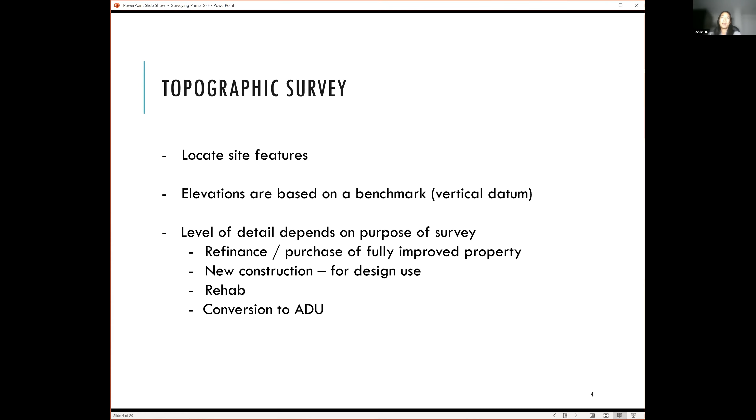A boundary survey's purpose is to establish the property line locations, identify any easements or rights of way, and also identify any boundary issues. Boundary issues might be: are there gaps or overlaps in title? Are there any errors in the legal description? Are there any encroachments onto the property based on the resulting location of the boundary?

The way in which we determine where the property line locations are is based on a bunch of evidence. So the first thing we always ask when an architect or homeowner asks us for a quote for a survey is, do you have the grant deed or the title report? The reason we ask for that is both of these documents contain the legal description of the property, which is what we use to determine where the property lines are. We also look to other types of maps: assessor's maps, monument maps, record maps. And then of course we go out in the field and collect field survey data. We look at all of this evidence in total to determine where the property lines are located. So I'll go through a couple samples of each of these.

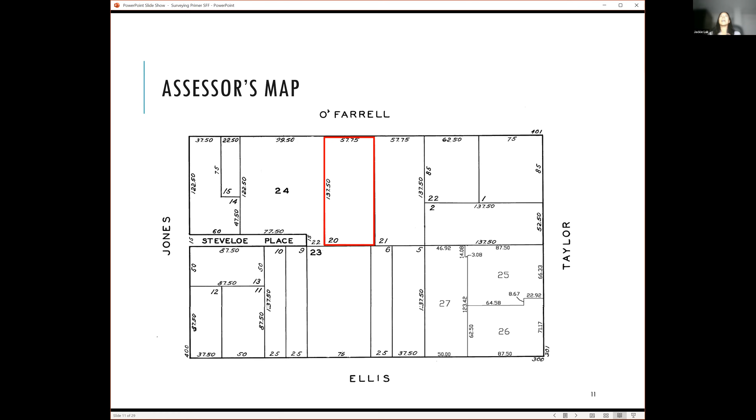There are sometimes inaccuracies in assessor's parcel maps because they're just quickly reading the deed and transposing the dimensions, but they're not official. So when there is a record map that conflicts with the assessor's map, the record map will always govern over the assessor's map.

Certain cities publish monument maps—San Francisco, Oakland, and Berkeley have them. There was a question about where monuments are and where you find them. For San Francisco, the monument maps are published on a website; for Oakland and Berkeley, you have to email the surveyor's office to get them. But I don't know that you as an architect would necessarily have a great need for obtaining these, because they're really for the surveyor's use in determining where the property boundaries are.

The monument maps are used to determine where right-of-way lines are for the city. Here, for this one in San Francisco, I'm zooming in on a corner of this monument map. This shows that in the upper right corner, there's a mark on a building—a 9-story building, on the corner, 1 foot up—and that mark is located 31.89 feet from the monument line.

So as a surveyor retracing the property boundary, let's say our property is on this block, then we would locate three or four monuments on Post Street, 3 or 4 monuments on this perpendicular street, and we would use the distances of those monuments shown on the map to retrace these monument lines, and then offset the distances shown on this map to establish the right-of-way lines of these respective streets.

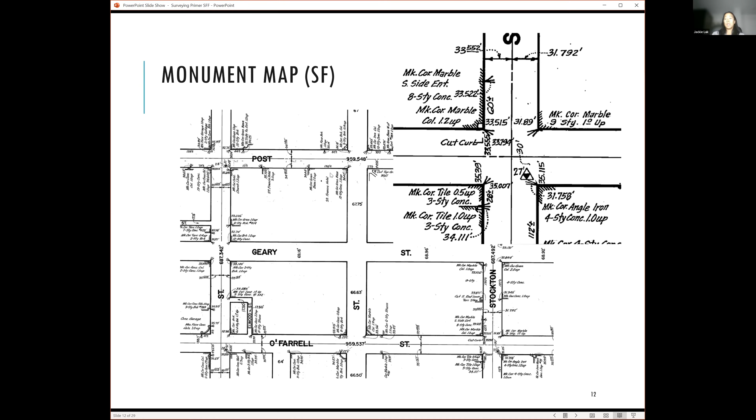Here's a sample of a map in Oakland. So if we zoom in on a particular block, if we were trying to determine where the property boundary were for a house on this block, the monuments that are circled are the ones within the street intersections, so we would locate those monuments.

What's boxed, so this 5N and 5W on the right-hand side, means that the monument line of Arlington Street and of Los Angeles Street is located 5 foot north and 5 foot west of the center line. So if we were to need to establish the right-of-way line of Los Angeles and 57th...

For the whole block, really, for Arlington, for example, let's say we located these 2 circled monuments, we draw a line connecting those 2, offset the line 5 feet to the south to establish the center line of Arlington, and then offset that line another 25 feet, since this is a 50-foot wide street, to establish the south right-of-way line of Arlington. We would do the same for the surrounding streets.

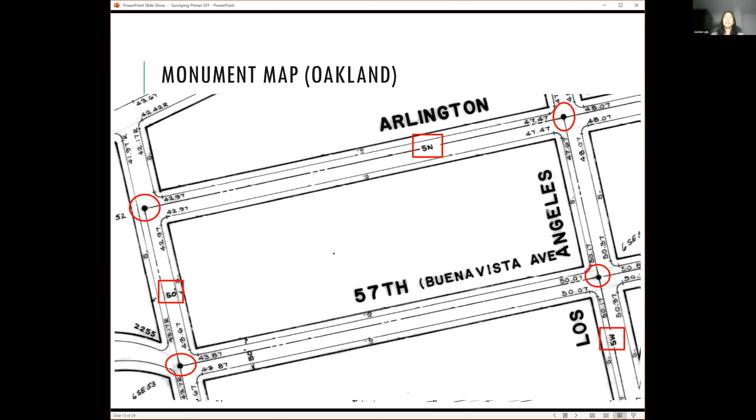So we go into the field and we look for all the monuments that are either maintained by the county or city, shown on record maps, or set by private surveyors as shown on corner records or records of survey, all of which are typically on file with the county that the property is located in. And then we also survey evidence of improvements such as fence lines, top of curb, and back of sidewalk.

So fence lines are not where the property line is located, but they are an indication of where a property line is believed to be. Fence lines are not taken with the same weight as monuments, but in the absence of monuments, we still use fence lines as evidence to determine where the property lines are.

So when surveyors talk about determining property lines, we call it a boundary resolution. The reason why we call it that is, if you hire 10 different surveyors, they may come up with 10 different solutions because we are weighing all of this evidence together. Most of the time it should not differ by more than an inch or two here and there, but it really depends on the case in terms of how much ambiguity there is, whether there are monuments, or whether we're relying solely on improvements to determine those property line locations.

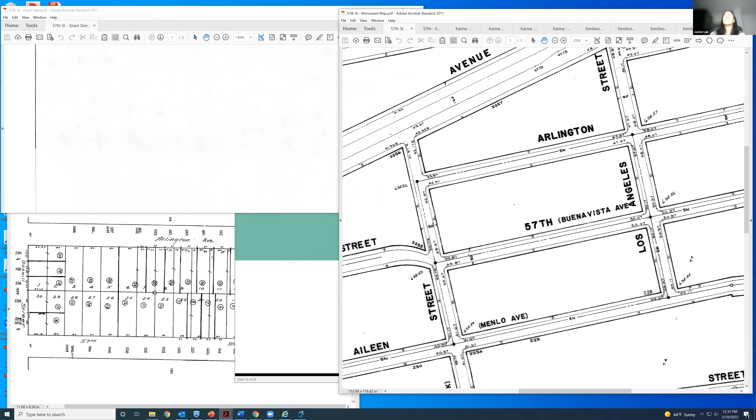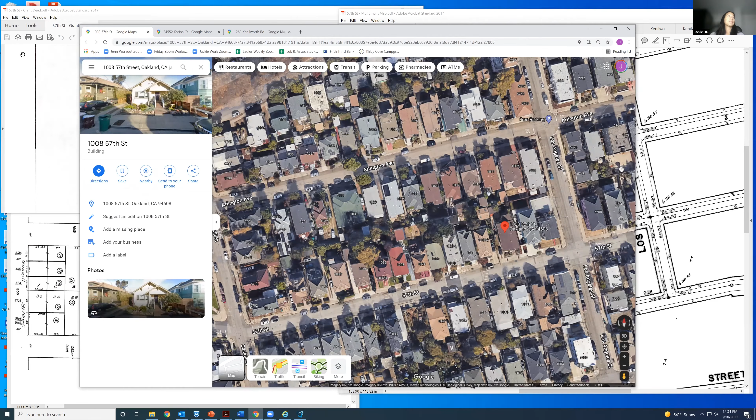All right, let's go through a few examples. The first is actually the monument map we were just looking at in Oakland. It's a single family home in Oakland, and I think their intent is to build an ADU in their backyard. So the scope of this survey was just a boundary survey to understand where the existing improvements are relative to the property line. This is the grant deed we received from the homeowner, this is the Assessor's Map, and this is the monument map we were just looking at.

Starting at the legal description, it says we're beginning at a point on the northerly line of 57th Street, going to the intersection of Los Angeles, then going 80 feet westerly to the point of beginning of this lot. Then running 40 feet along 57th Street, then at right angles 100 feet, 40 feet, 100 feet, back down to the point of beginning. So what I described earlier was locating 2 or 3 monuments on Los Angeles and 2 or 3 along 57th, then trying to locate these monuments from the monument map so we could reestablish this block. Because this is a metes and bounds description, it has a point of beginning that starts at a point of commencement from this corner and goes over. Once we establish the monument lines and right-of-way lines from 57th and Los Angeles, we can essentially put back this parcel.

The assessor's map is important because sometimes it's just a lot and block description - let's say this refers to lot 18 of this block from a map from 1890. If we don't have monuments, or even if we do, we may find that the measured overall dimension of the block is different, less or more, than the record dimension. So the overall dimension on the 1890 map might be 600, whereas when we measure in the field based on bisecting the curb or locating monument lines, maybe it's 600.5 - the overall block is 6 inches larger than the record dimension. Then, depending on how the parcel is described, we end up prorating the overage across all the lots. So if there's an extra 6 inches over 10 lots, each lot gets an extra amount - rather than being 40 feet, it would be 40.05 feet, because the block is bigger than the record dimension.

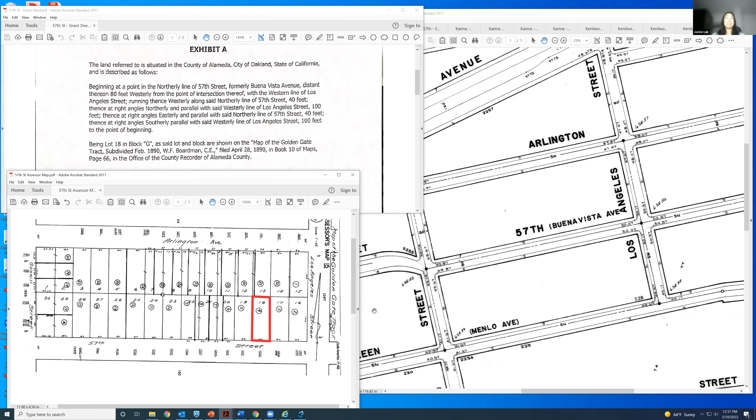So this is what the final product of that survey looked like. We're showing the monuments we located on 57th, ties from that monument line to the corner, and the 80-foot dimension shown in the deed. This is the property boundary, and we're showing the building - the accessory building in the back - as well as dimensions from the building corners to the various property lines.

So that's one example of a pretty limited scope of survey that we typically do.

Here's another example. This is a 10,000 square foot lot in Hayward that our client is looking to build a new single family home on.

This is the title report we received, which is just a lot and block legal description - lot 30 of this tract map. So basically all we have to do is look at this tract map to establish the property boundaries. This is the lot in question, and these are the monuments we showed on an earlier slide that we located.

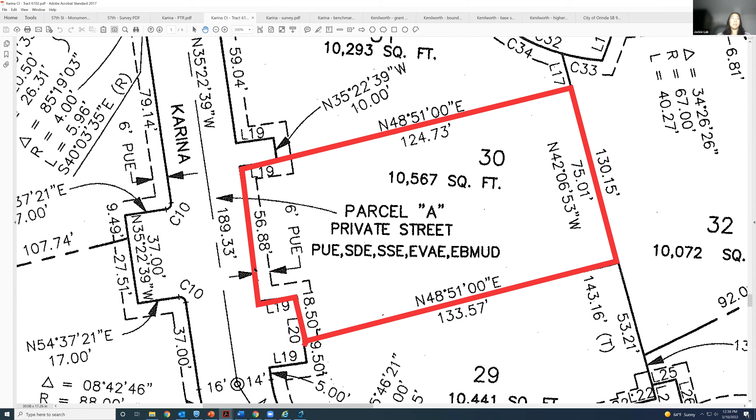Also on this map, they're showing parcel A, which is a private street, Karina Court, has various easements across it. And on the parcel itself, there's a 6-foot PUE, public utility easement. Basically all of the information needed to determine the property boundary is contained on this map.

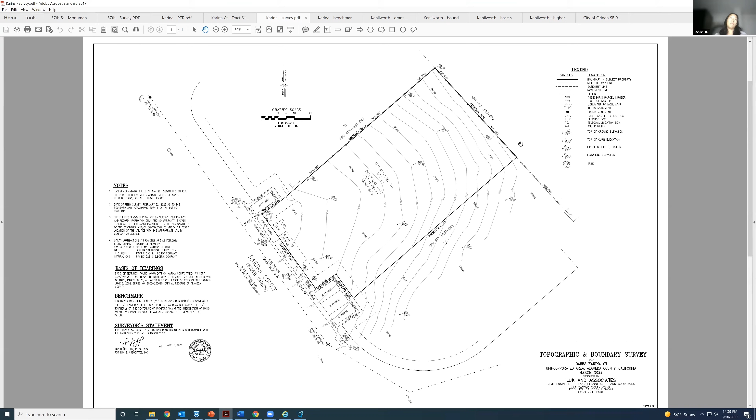So this is what our final product looked like. Obviously, because they were building a new home on the property, they need to know the elevation. This is a pretty steeply sloping lot, so they want to know how it slopes. We show the monuments we found, how we're tying to the property line, the easements on the property, the site features, topography, parking spaces, evidence of utilities we find on the lot, and the elevations.

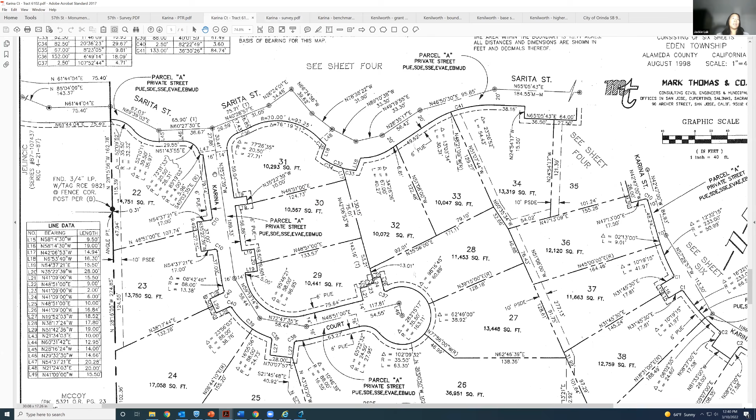On the survey, we will often list a basis of bearings and a benchmark. Basis of bearings is basically how we came up with the bearings shown. In this case it's pretty straightforward because we're matching the bearings shown on this map. On the 57th Street survey, nobody did a survey of this particular lot in the past.

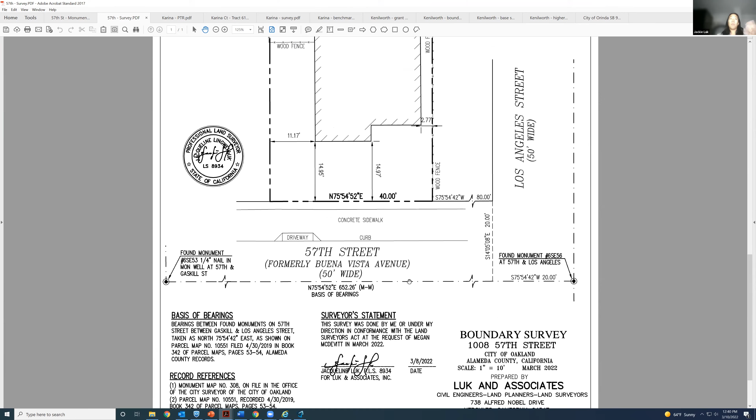But somebody did do a survey of some other parcel where they showed the bearing between these two monuments. So in that case, our basis of bearings is the bearing between these two monuments, taken as North 755442 East, as shown on this parcel map filed in 2019. That's an example of using a previously recorded map as evidence for how we came up with the bearing for this parcel.

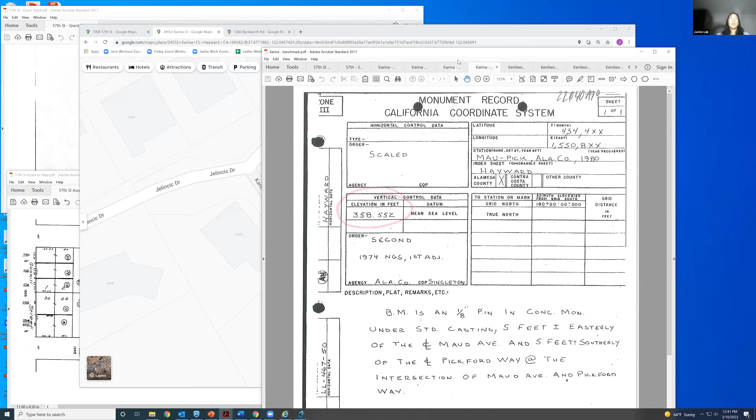The other piece of information on this survey is the benchmark, because we're showing elevations. This is the benchmark we used - a published benchmark by Alameda County with a specific elevation, specifying the datum, which is mean sea level. We located this benchmark and used it to establish the elevations for the property.

Whenever we show elevations on a property, it's possible to set what surveyors call a temporary benchmark, TBM, where they're just setting a mark or nail in the sidewalk and saying this is elevation 100. If that's the case, the datum is just an assumed datum, because we assigned an arbitrary elevation to this nail, and everything shown on the survey is relative to that.

We usually try, when possible, to tie into a published benchmark. Cities sometimes require it - City of Oakland generally requires surveys be tied to their datum so they can compare apples to apples. But oftentimes, if it's a survey for some limited purpose where you only need relative elevations, you don't really need to go to the trouble of tying into an established datum, and an assumed datum is fine. As I mentioned, if a FEMA flood elevation is important, it would definitely be necessary to tie into the NAVD 88 datum.

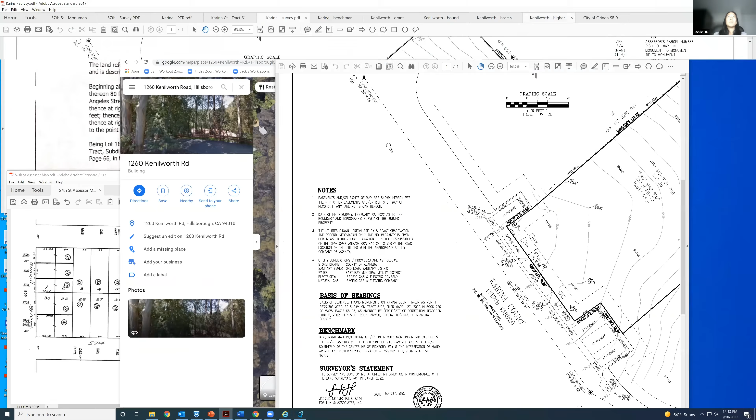And then our last example - this is a house, a bigger property, about 2.7 acres in Hillsborough, pretty heavily vegetated. This is the legal description of the parcel. Whenever it says 'beginning' and has a lot of words, it's to the point of beginning. This is another example of a metes and bounds description.

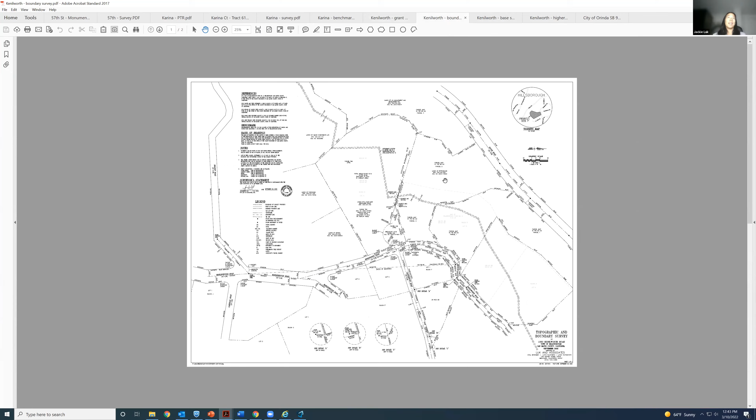Just to show you an example of how complicated it can get - this is the parcel here. In order to determine the property line, we had to locate monuments pretty far away from the site to reestablish this property boundary. This sometimes happens - this is a larger parcel, 2.7 acres, but it can be this complicated for a parcel that's only 5,000 square feet. So when pricing for boundary surveys varies widely, this is one of the reasons why.

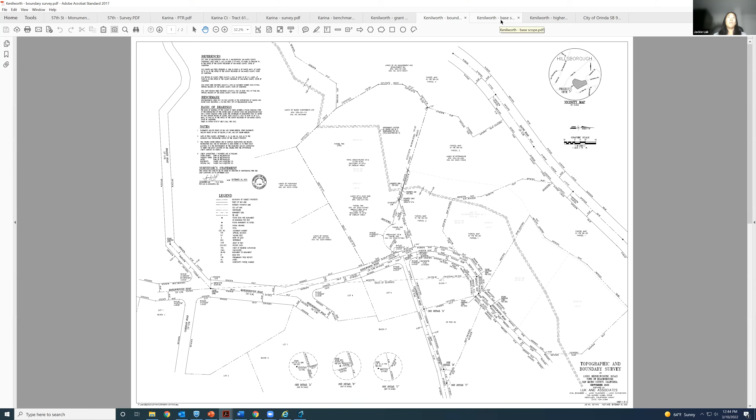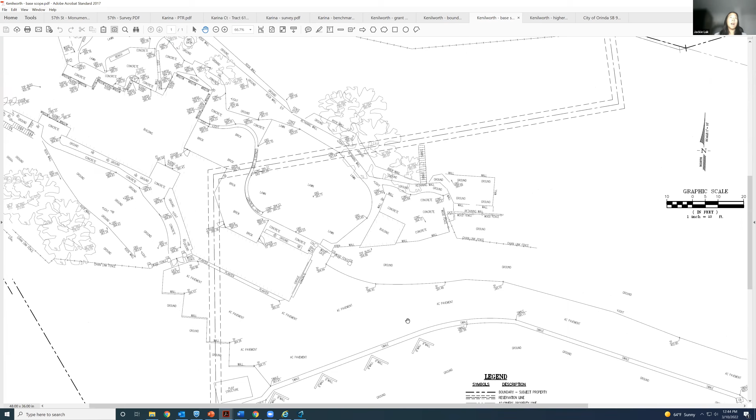In terms of the scope of this topographic survey, the homeowner was doing improvements to the property, but it wasn't totally clear at the start of the project where their improvements would be. So our base price and initial scope was only to survey the existing improvements—the roadway up to the house, and anything with an existing site feature like a wall, fence, or building.

As they got further into design, they realized they needed much more data. So we ended up going back several times to get more topographic information based on needs from their architect and civil engineer, so that our final survey included a lot of tree information, contours, and that kind of thing.

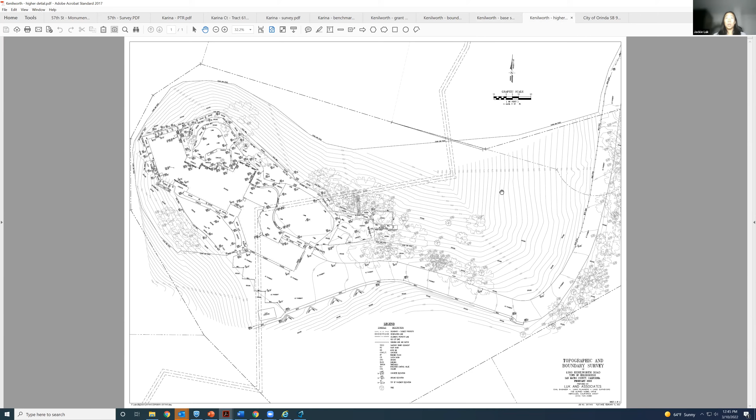There were a couple questions regarding scope that people had—what things are expensive or not. If you do need elevation information, that adds cost. If you do need to know where trees are located, that's also cost. For this project, because it was so heavily vegetated, our initial proposal excluded anything in dense areas of vegetation we couldn't access. The clearer the site is from a sight lines point of view, the simpler it is for us to survey it.

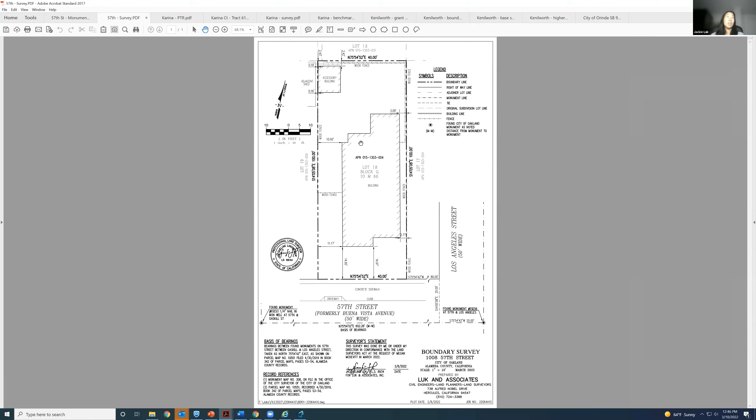So how much do surveys cost? A survey like this, pretty straightforward, just establishing property boundaries, cost about $2,800. This one, a 10,000 square foot vacant lot with a pretty straightforward boundary resolution, was about $5,000. And the topographic and boundary survey here—the base scope was about $14,000, and all the additional detail was an additional 8 or so. So that gives you an idea of what pricing is based on scope.

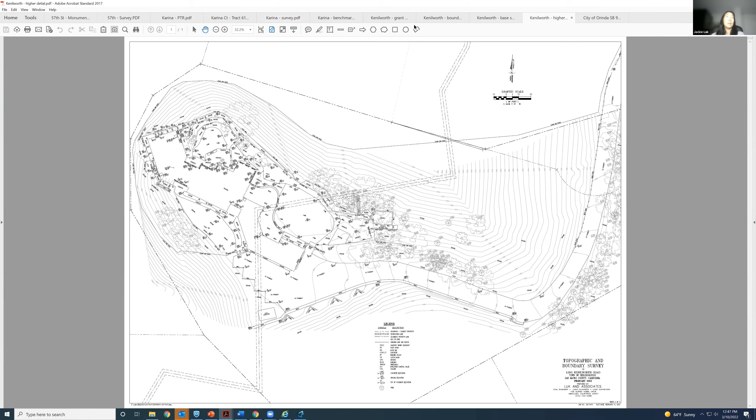Okay, so just looking at some of these questions—they're a little bit all over the place, so I think I might come back to the questions at the end. So let's see.

Is our output digital, 2D, CAD, or any 3D software? If we generate contours, we can send that out as a 3D surface. Otherwise, for basic surveys where we're not generating contours, all of our information is issued in 2D CAD—the boundary and the topo. The boundary is obviously 2D, and the topo, unless we build a surface, will also be 2D line work. We typically issue a CAD file containing all the points we survey; those will not be elevated, but can be converted to elevation if needed.

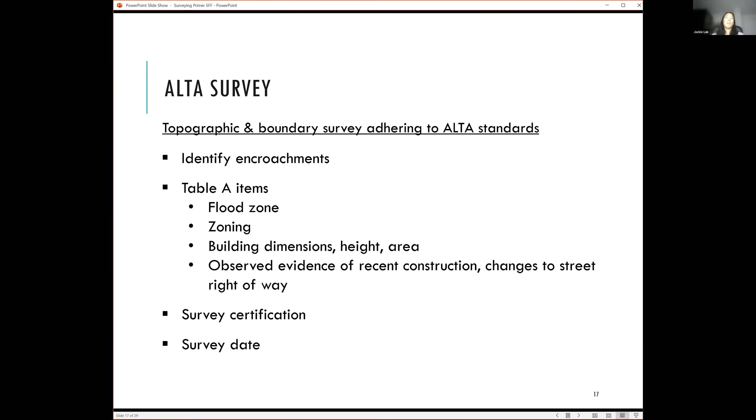It also includes observing evidence of recent construction and changes to street right-of-way. Oftentimes the ALTA survey is required to be certified to certain parties and has to have a date within 30 days of closing for whatever reason.

ALTA surveys are typically required as due diligence when a property is being purchased or refinanced. This is pretty common in a lot of our projects where a lender or title insurer will require an ALTA survey to be done.

They are often done in multiple stages: at acquisition, when the property is purchased, and at construction closing, where there's often an update required by the lender.

Sometimes we do an ALTA pro forma, which is, let's say, for an affordable housing project that's recording an airspace parcel map. The lender wants to see what the condition of the property looks like after closing.

Often on these types of deals, the parcel map gets recorded at closing because it's a complicated transaction where, say, the city owns the land and is transferring it to a nonprofit developer. There's an order in which documents record, and the map can only record subsequent to the transfer.

So then we would produce an ALTA survey based on a title pro forma report that shows the condition of the property after closing is completed.

Then often post-construction, we would do an as-built ALTA showing all the newly built improvements, again for this affordable housing project, also based on a title report at the end of construction, which may show new easements and encumbrances recorded during construction of the project.

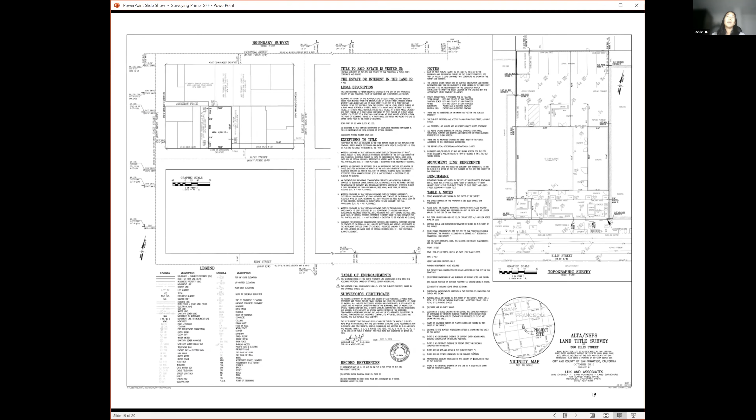There's a bunch of notes in there showing what the title report says, what the exceptions to title are, a table of encroachments, a certain format of surveyor's certificate, and a bunch of Table A notes required for the ALTA.

Touching quickly on subdivisions, a subdivision is when you want to subdivide land into 2 or more parcels. It's always a 2-step process.

The first step is filing a tentative map, typically with the city's or county's planning department. The tentative map is basically a topographic and boundary survey formatted to show additional information, such as where your new lot line wants to be and whether there are any new easements you want to record on the parcel or new parcel.

Then the second step, after the tentative map is approved by the jurisdiction, is filing a parcel map or a final map. The only difference between the two is how many lots you're creating. If you're creating 4 lots or fewer, that's a parcel map, and if you're creating 5 lots or more, it's a final map.

Usually a final map has additional layers of approval. For example, in San Francisco and Oakland, a final map needs to go to city council on their consent agenda to be approved and signed, whereas the parcel map does not.

Subdivisions can be land subdivisions, which is what most people are used to seeing, but they can also be subdivisions of airspace, such as condominiums. A condominium is a 1-lot subdivision, so basically the land itself is not being subdivided, but the airspace above the land is being subdivided.

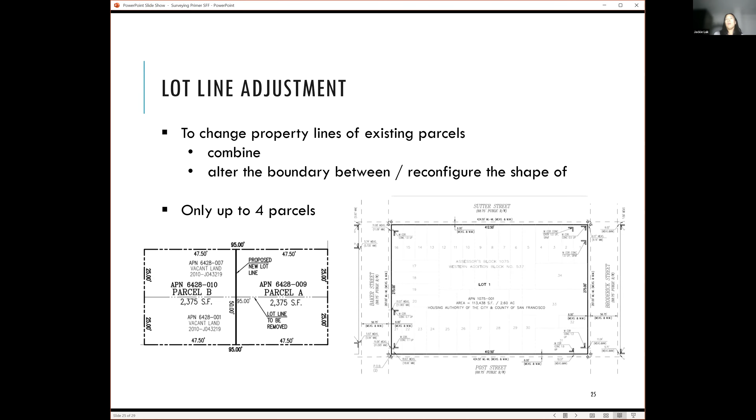This is an example of a property in San Francisco that consisted of 34 historical lots, and the lots were never formally merged. Unfortunately, you cannot do a lot line adjustment here, because even though we're merging parcels into one, it involves more than 4 original parcels. Therefore, it would require a parcel map to merge them.

Record of survey - that sounds like a question a lot of people are interested in. When is it required? The Land Surveyors Act says it's required when there's a material discrepancy found in the field that differs from recorded maps, or for retracement of lines that are not shown or ascertainable from recorded maps. So if we were to do a survey and found that the property line dimension was off by 2 feet, that would be a reason to record a record of survey. This second portion of the definition, for retracement of lines not shown or ascertainable from record maps, one might argue - and some surveyors do argue - that it means any metes and bounds description, because it's saying 'beginning at this point, thence 200 feet to the easterly line of this deed from 1946,' and so on. Some surveyors might argue that any metes and bounds description requires a record of survey.

The practical aspect is that homeowners don't want to pay for records of survey because they're expensive to file. Depending on the county the property is in, they receive a decent level of scrutiny from the county surveyor's office. For example, we did a property in Napa where they wanted to file a record of survey. The survey itself was probably $5,000 to do - it was a 4,000 square foot lot. The record of survey was another $6,000. So it easily doubles the cost because there's much higher documentation requirements, and we have to set property corners at the lot. It is to the public benefit because it gets recorded, and it's there for any future surveyor or homeowner to see, but it's at an expense that the homeowner has to pay for.

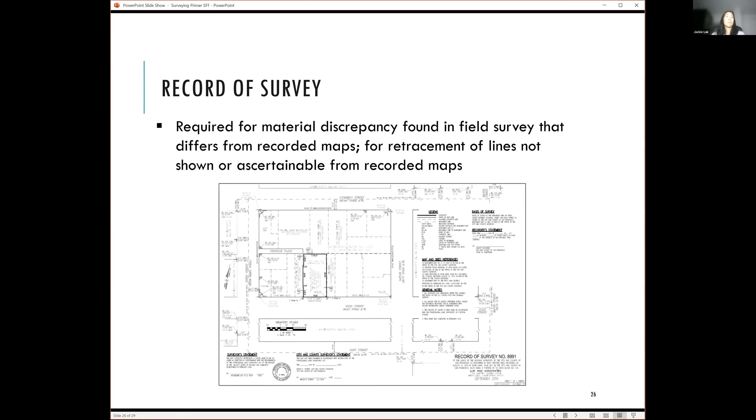Hey, Jackie. Jackie? Yes. Yeah, I don't know how much more you have in your presentation, but I'm aware of the time, and usually we try to finish by around 1:30. One thing I thought I'd throw out - if you want, and people are interested, we could open it up for an actual dialogue rather than using the chat box. Sure, yeah, that would be great.

I'm pretty much done - the rest of the stuff is pretty much construction staking. The only thing I want to say is that this is about setting stakes in the field. The reason this is relevant is that somebody had asked about asking surveyors to set property corners, and surveyors have been hesitant to do that. They've said, well, we can stake the property line for you, but we're not going to set a corner. Practically speaking, what it is in the field can be the same thing - it could be a nail in the corner. But as surveyors, if we set a property corner, we are obligated to file a record of survey or a corner record.

So if you want us to come out to stake the property line location so the homeowner can erect a fence, we typically set those as offsets so they can actually build the fence at the property line location. We don't want to set something that obligates us to file a corner record or record of survey, because that entails a much more expensive cost.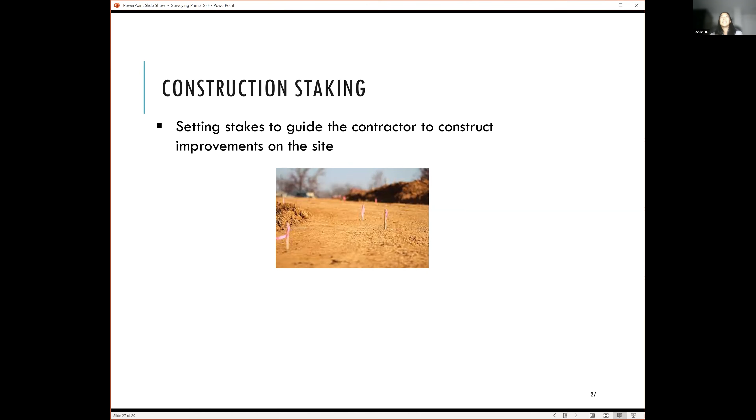The other comment about construction staking: oftentimes homeowners will ask us, okay, I need to know where my property lines are, and I need you to mark it in the field. When we send them a quote, they're often like, why is it so expensive? Why do you have to come out twice? We always tell them that when we come out to do the initial survey, we don't know where the property line is. We're just collecting data that we process back in the office to determine the property line locations. So anytime we do construction staking for a property line or for an ADU, it's always the second visit, because the first visit is to collect the data to determine the property line location, and the second visit is to actually stake the location of the property line.

Quiet title actions are pretty esoteric, so I think I can probably just skip that. And yep, let's open it up to any questions.

I have a question. Can you hear me? Yes. Okay, this is very simple. I don't know if you can see my picture, but this is so basic.

Let's suppose we have a site section, and the rectangle in my picture is the drawing. The site starts down here and goes uphill until it comes up here. Now, if at the low end I know the corner of the property, I think I know the answer to this, but if I measure up this hill and say the distance to the next property line is 100 feet, and I know the direction, if I measure up the hill 100 feet, I will not be at the property corner, will I? Oh, because it's a hill, no.

So when you're measuring that, if we get our property drawing and it's a tilted site or something like that, we can't just take those property boundary dimensions and measure them out in the field and get it exactly right, can we? No. So when you guys are measuring, if we start at this property corner at the bottom and go 100 feet, are you going level or following some arc of the earth? I mean, 100 feet is a pretty short distance, so the curvature of the earth only really gets taken into account over long distances. So the 100 feet is the level distance, the horizontal distance.